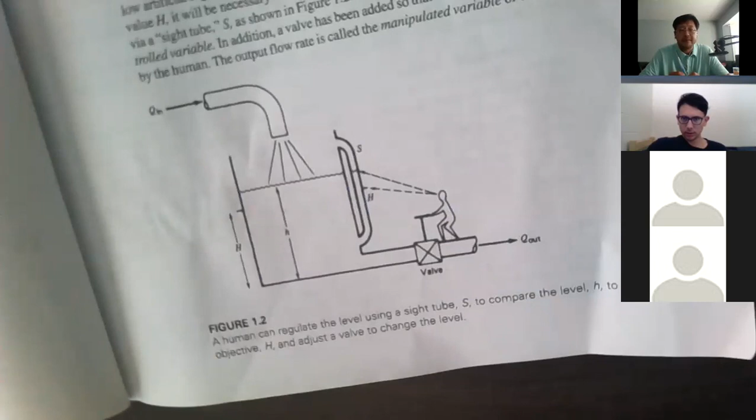Well, humans have been doing this for thousands of years. We just hire somebody, right? Well, people are expensive. You have to pay wages. And people can be tired, fall asleep, make a mistake. So this works, but this is better. As technology evolved, we figured out how to do it automatically. That's what we're going to study.

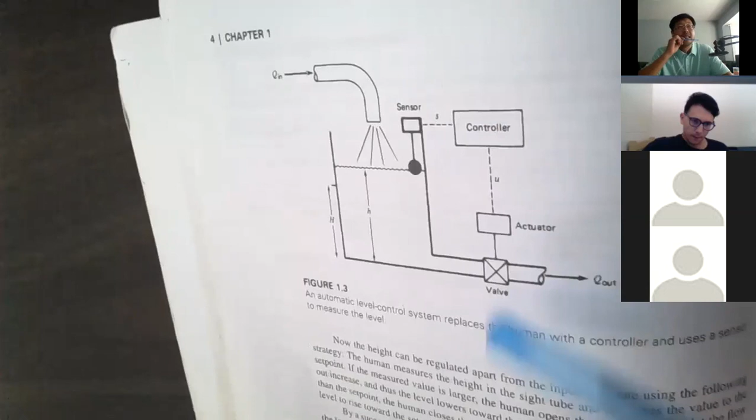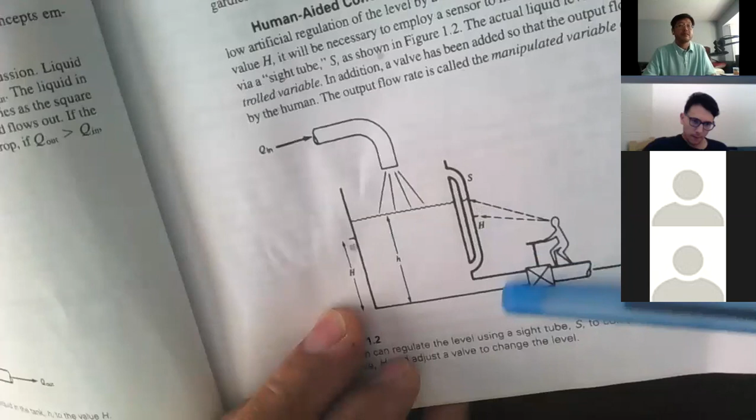Instead of having a person, we will have the eye, the muscle, the brain. So this literally replaces a human being. This is the brain, this is the eye or ear, this is the muscle, and the same valve, instead of being controlled by a person, will be controlled by an actuator. So that is what we're going to do and how we're going to do it. We will study each component.

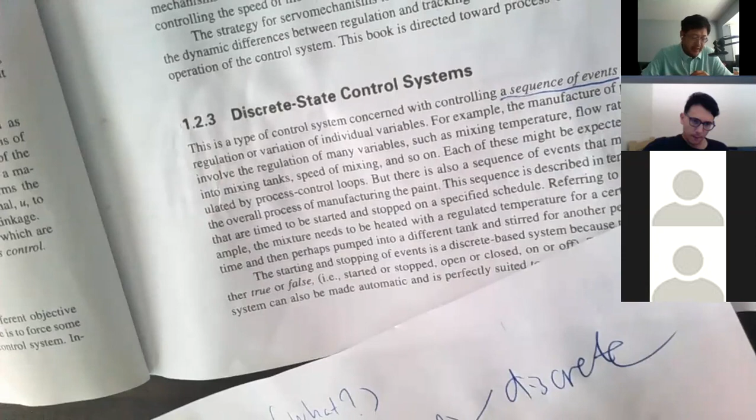There are two types of control systems. The first type is called the discrete control system. It acts like a timer. It will turn something on and off in a sequence, a sequence of events. A perfect example is the dishwasher. If you observe how a dishwasher works, it's just a sequence of events over about two hours, with timers turning different components on and off. That's called a sequence of events.

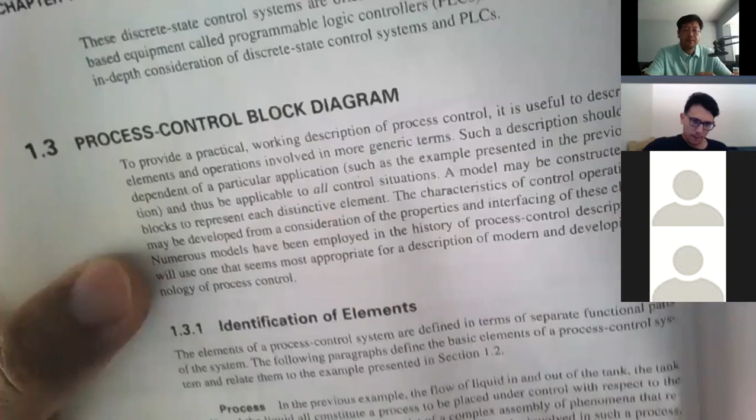That is actually not our subject. This book is not talking about a dishwasher. So what will this book cover? We will talk about pizza ovens. Actually, this book covers process control. One process control we use every day is the pizza oven. Instead of calling it a pizza oven, we call it process control. Just remember, it's the same thing as your pizza oven.

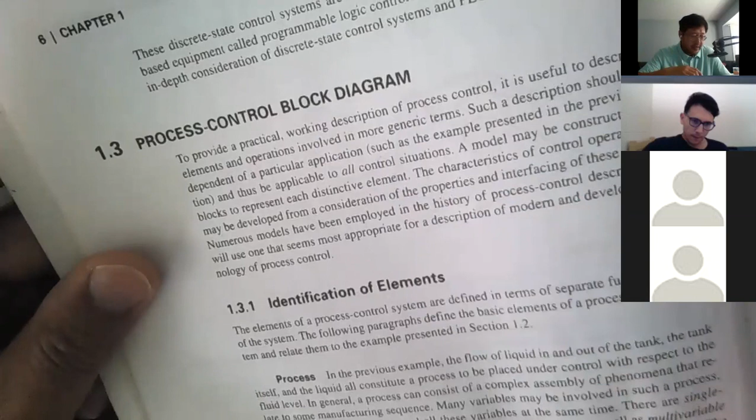Process control generally controls a process. In the case of a pizza oven, we control the temperature of the oven, right? In industrial or commercial settings, it's not just temperature. We may want to control the flow, the temperature, humidity.

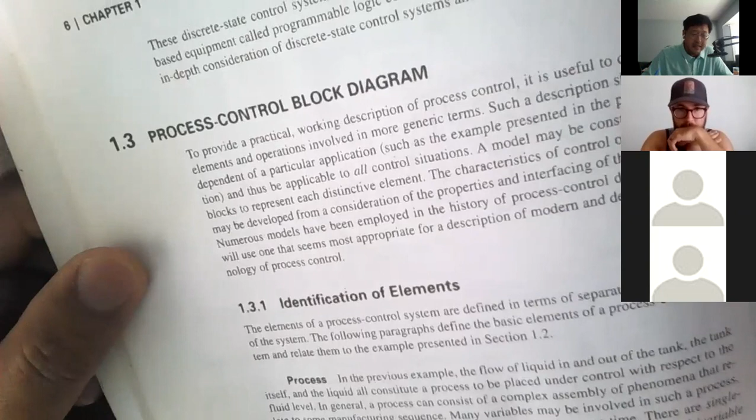Pressure. So we want to control a lot of things. In a typical industrial setting, we might want to control a few dozen different processes. So in a factory setting, we are talking about 20 or 30 of those controls. So we call it a process control.

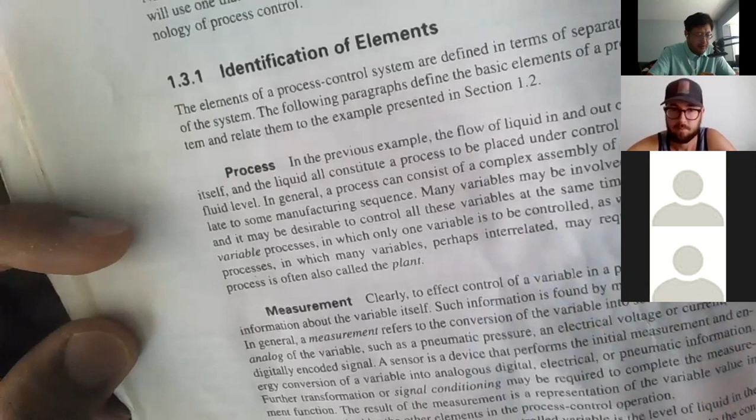So what is a process? A couple of definitions. A process is a variable which can be controlled. A process is a variable we can control. So a temperature is a variable. A flow is another variable. So multi-variable. We want to control those variables.

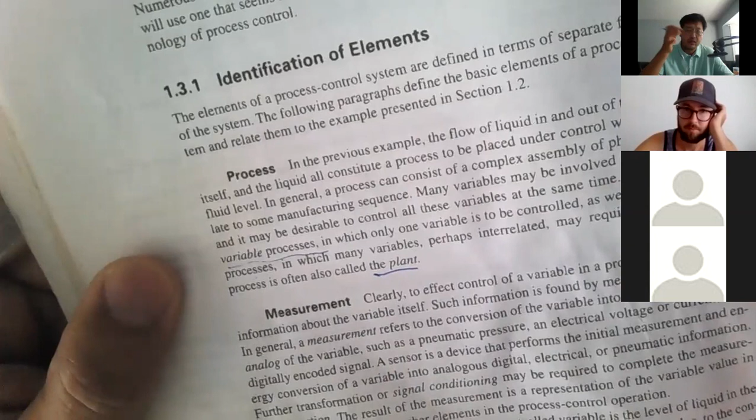So that's a process. A combination of all those is called a plant. So a plant may have 20 variables we want to control. When we're cooking cat food, for example, you might control the pressure, the temperature, the flow, whatever. So that's called a plant.

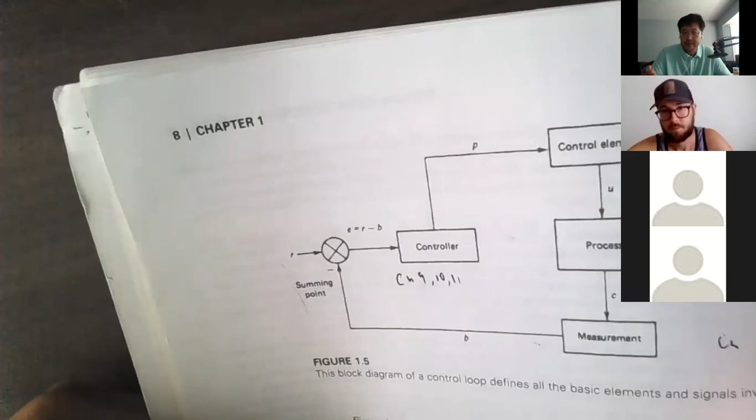What are the components? Number 3. We're going through pretty fast. We're already on the 3rd topic. The components of your system. What are the components? 1, 2, 3, 4. 4 components. So a process control system for a single variable, for a single process, we're talking about the 4 components.

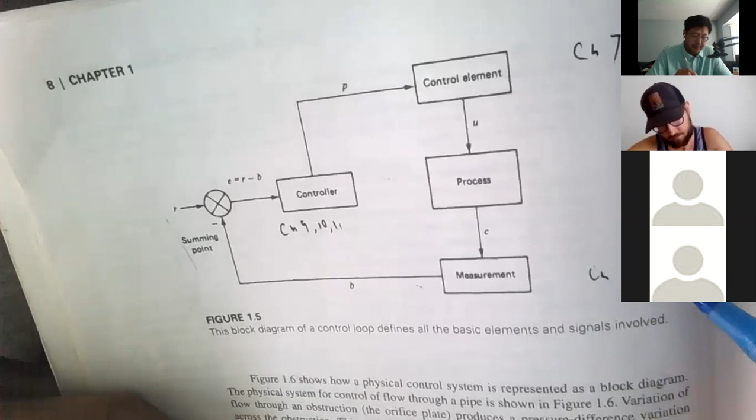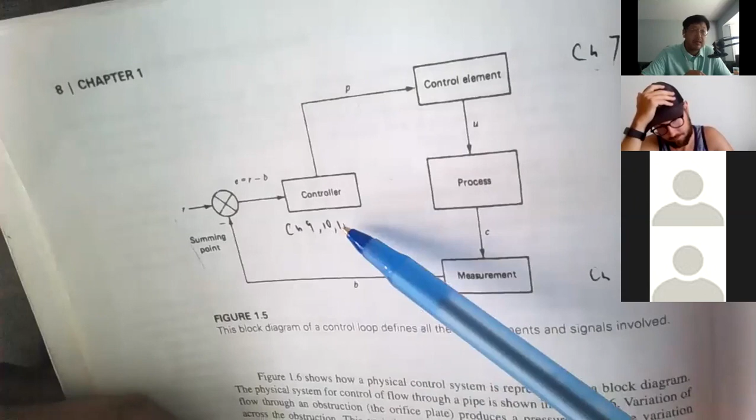And we started with this one. The first component is called measurement. We will talk about that in 3 chapters: Chapter 4, Chapter 5, and Chapter 6. Then in Chapter 7, we will talk about the muscles, the control element. That's the eye, that's the muscle. Then Chapter 9, Chapter 10, and Chapter 11, we talk about the brain of the control system.

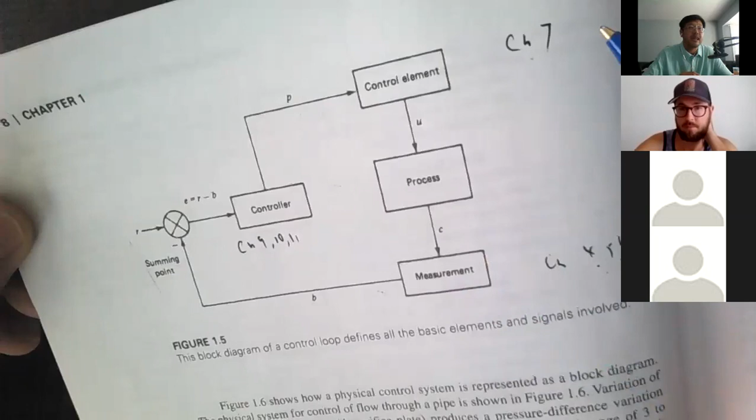So if you look at our textbook, we have how many chapters? We have 12 chapters. Out of the 12 chapters, 7 chapters are here: 4, 5, 6, 7, 9, 10, 11. Those are the key chapters, plus chapter 1, which will be the overall introduction. Then we will go into those chapters and cover each component. So that's our plan for the semester.

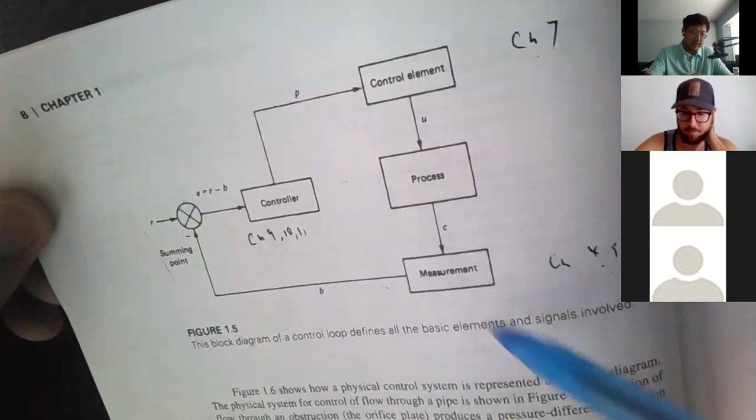We might stop at chapter 6 or 7 and have our midterm. After the midterm, we will continue. So those are the first half, and then we have a second half starting with chapter 7.

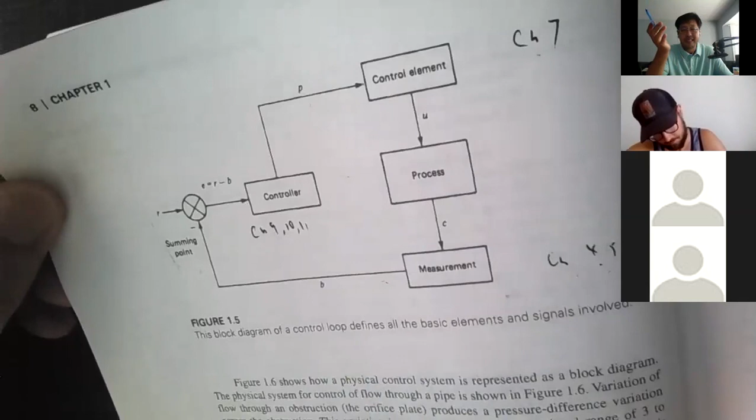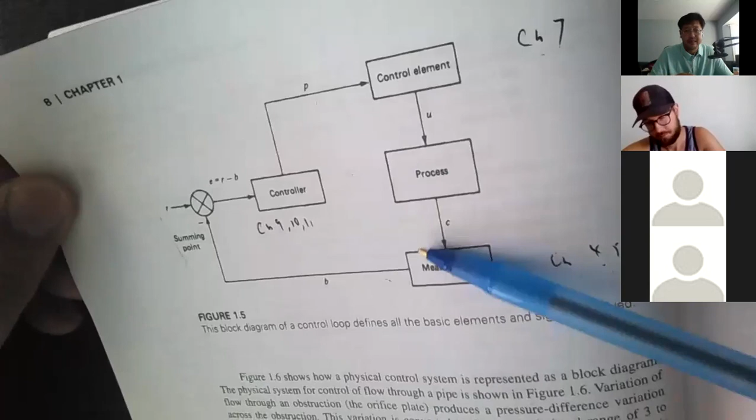So this is called the block diagram of a control system. If you notice, this control system forms a circle. So every control is called a loop. A plant might have 20 loops, right? That is one of the 20 loops for a plant. This loop is represented using what we call a block diagram. The loop can be represented many different ways. That's one way: block diagram.

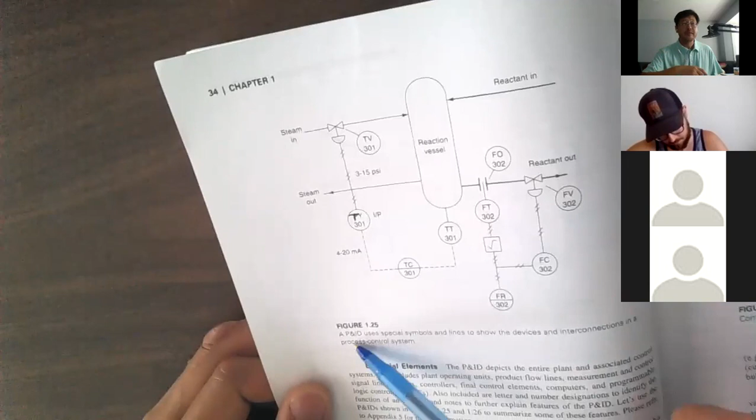Is there any other way to represent the loop besides block diagram? Yes, there are many others. What is the most common? What is the standard? This is the standard. The same loop, instead of a block diagram, this is called P&ID, piping and instrumentation. We'll talk about that later, but a single loop can be represented many different ways: block diagram and piping and instrumentation diagram, P&ID. This is the standard diagram. If you want to be a control engineer, that is the language you speak to another control engineer.

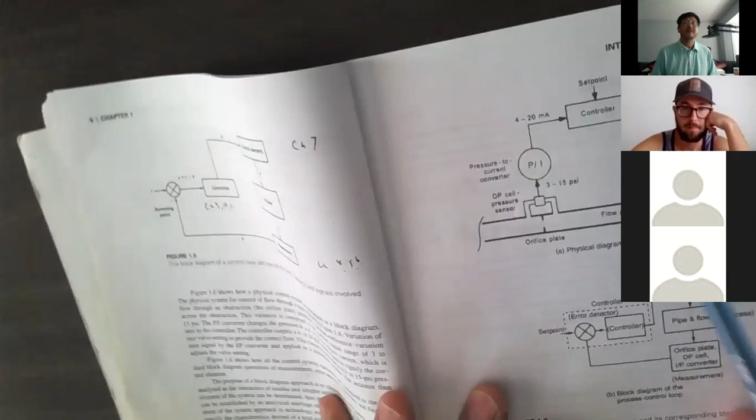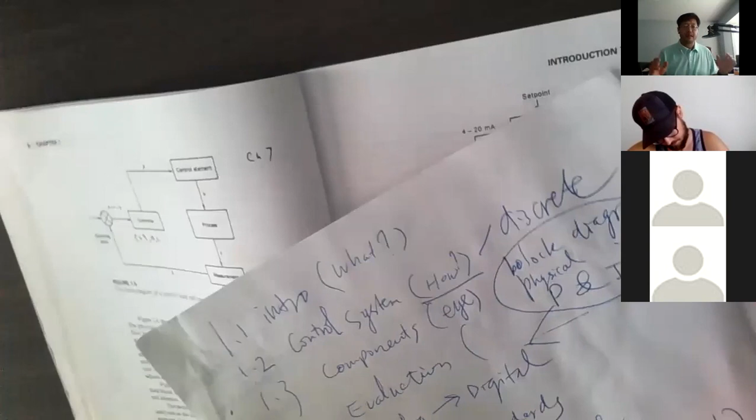Alternatively, another way to represent the same thing is called a physical diagram. This is a physical diagram. So we have a block diagram, a physical diagram, and P&ID. These are the three most common tools we can use to represent a loop, one process control.

So let's look at the physical diagram. The physical diagram is kind of like a picture of what's going on. It's not a realistic picture, but it's pretty good for engineers. So I can draw this. I cannot draw the realistic one.

So this is a flow control. So this is a pipe. We are pumping water, pumping oil, or pumping gas, whatever material you are pumping. And how do we control the flow? So this is the valve to control the flow. That's the sensor. So this is the eye. The sensor will measure the flow.

What is the output of my sensor? It's pneumatic output. So this is a typical sensor with a pneumatic output. The pressure will be 3 to 15 psi. So the minimum pressure, the sensor output will be 3 psi. The maximum will be 15 psi. So this psi, the pressure represents the flow, like 1 gallon per minute, or 10 gallon per minute, whatever. So this sensor output will go into our second component.

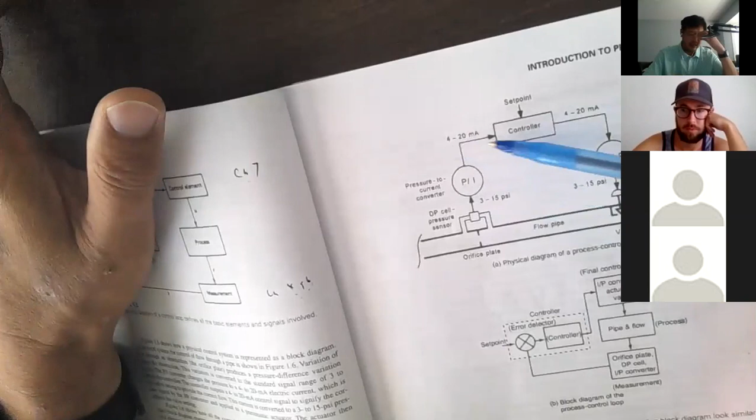So sensor, converter, and after we convert the pressure into milliamps, the milliamps goes into the electronic controller. So we are looking at some electronic components. And this electronic component will be the brain of the system. And this brain has a boss, right? The boss tells the brain how much flow. So basically the operator will set the set point. I want 10 gallon per minute. I want 100 gallon per minute. Whatever the operator wanted, he will set the set point.

So the controller will make a decision based on the set point. The decision will go to the muscle, right here. The decision is another current. So that's a typical controller, current in, current out. But this muscle does not recognize current. This muscle is a pneumatic muscle, a pneumatic actuator. The actuator wants pressure. So again, we have another converter called the IP converter. The IP converter will convert the current into pressure, and that pressure will open and close this valve.

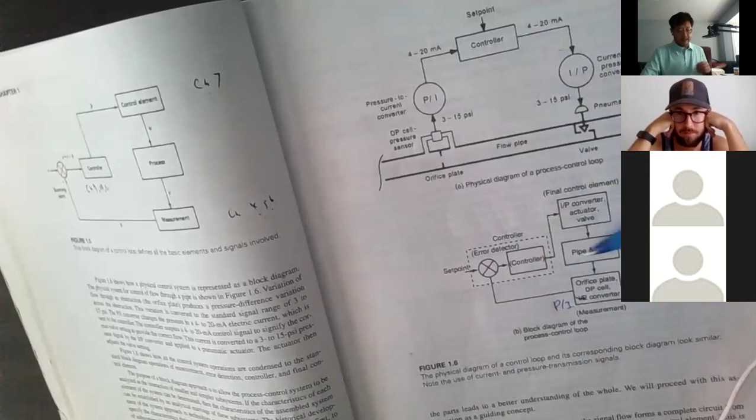So this physical component is represented right here. And then the next component will be the controller. The next component will be the actuator. And the pipe and the flow will be the process. So this is the block diagram. We are mapping one-to-one. That's the muscle. That's your process. That's your sensor. That's your brain.

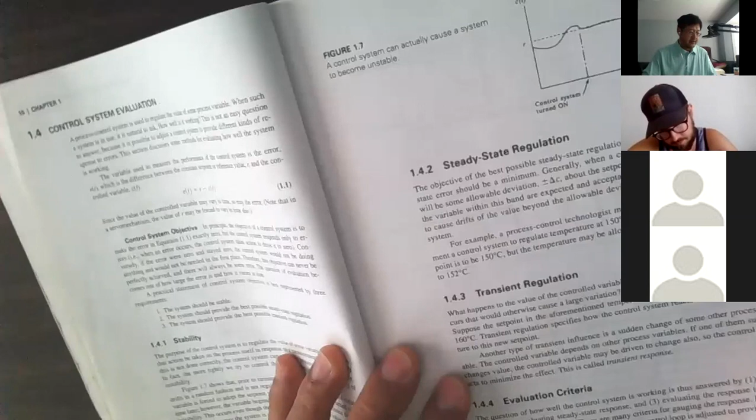All right. That's our third topic. Next topic is evaluation. How do we evaluate? What is a good control system? Well, it all depends on the requirement. So there are three ways to evaluate. First, is it stable? Second, is it accurate? Third, is it fast? So when we want to evaluate our control system, generally we evaluate with three criteria.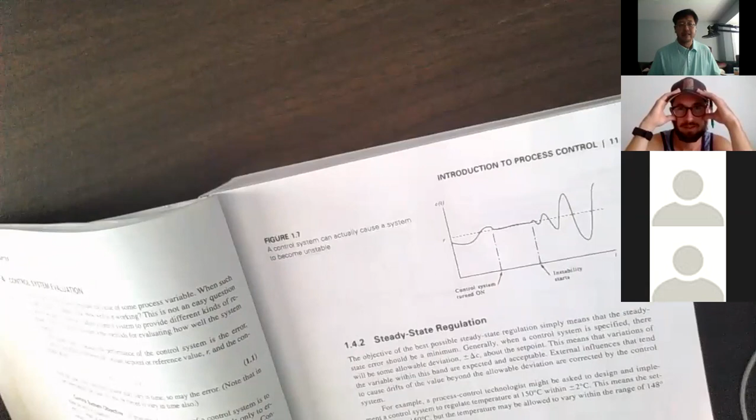Criteria number one, is it stable. That's called stable. That's called unstable. So this is unstable, obviously. That's a control system that completely failed. So when you're cooking cat food, your cat food will be either too cold, undercooked, or burned, overcooked. So that's unstable, lost control. So that's number one. Obviously, we want a system which is stable.

Second, even though your system is stable, how accurate is it? Accuracy. It all depends on the requirement, your customer. Your customer will decide how accurate you want your control system. For example, when you're baking pizza, you set the temperature to 350 degrees, right? Is that how you bake pizza? 350? 400? Okay, 400. You like crispy, right?

So 400. How about accuracy? Do you worry if it's 5 degrees off of 400? Or 10 degrees off, or 50 degrees off? 50 degrees off may not be acceptable. So accuracy is another thing.

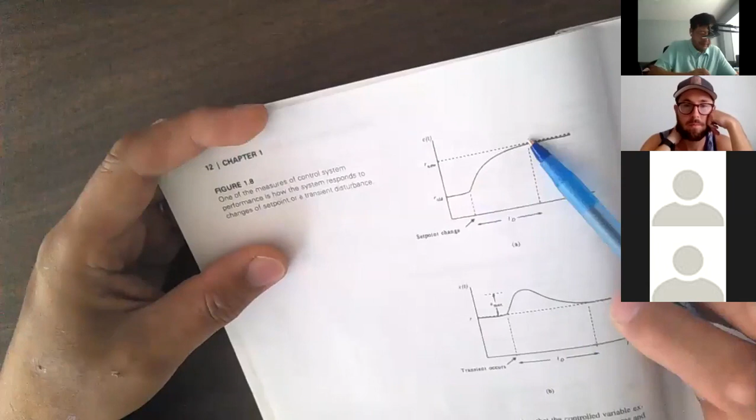And how do we reach our target? There are two methods, or two responses, to reach our target. Response number one is called damped response. So this is a damped response. A lot of our control systems have a damped response. Alternatively, we can have a second response called oscillating, or cyclic. So we might also have a cyclic response.

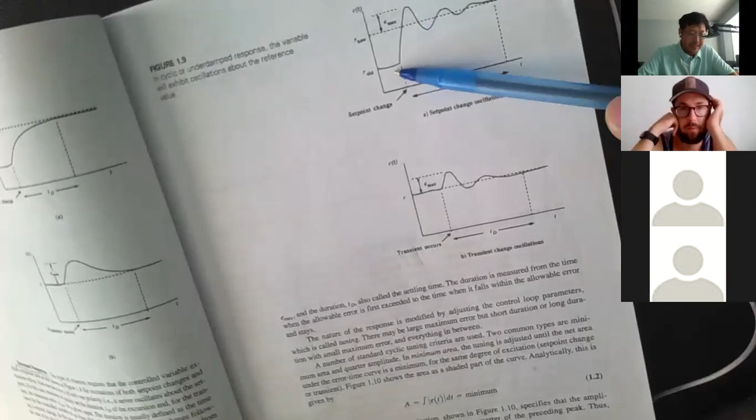Which one is better? Well, generally, if you want speed, that's called overcorrection. Like if you want to drive from here to Kansas City really fast. You drive so fast, when you brake, you pass Kansas City, like a bad driver. Then you back up, but you back too hard, and you go forward again, backwards, and finally you reach Kansas City.

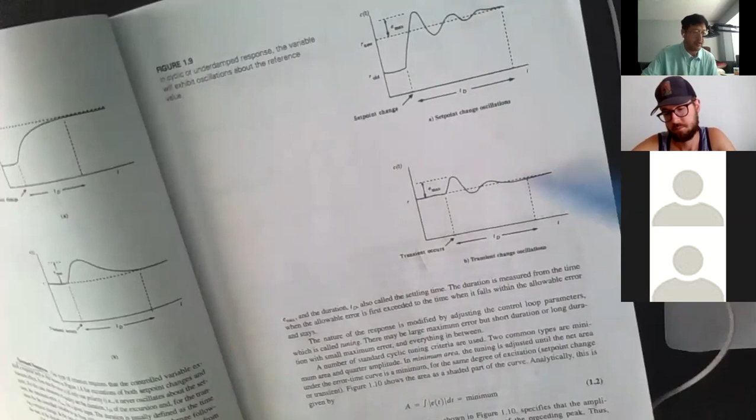That's terrible. But actually, that's a good way to control when you want speed. In many control systems, that's how we do it fast. If you drive, it doesn't make sense. But we're talking about, for example, the hard drive finding the right track. You find it pretty quickly that way. Of course, the damped response is always good. Many systems, for example room temperature, might do this. So that is damped and cyclic control. That's the first full topic.

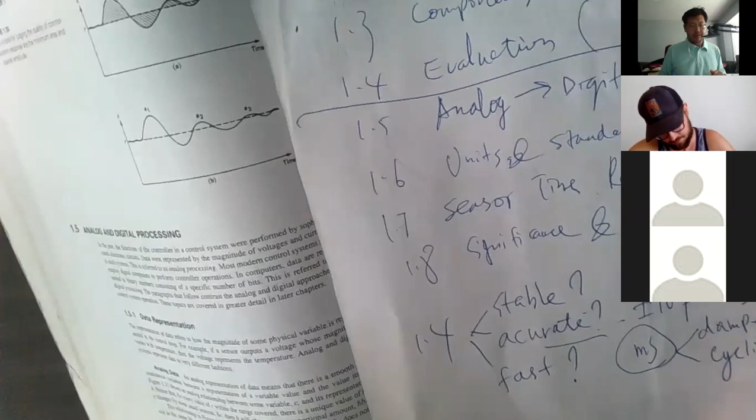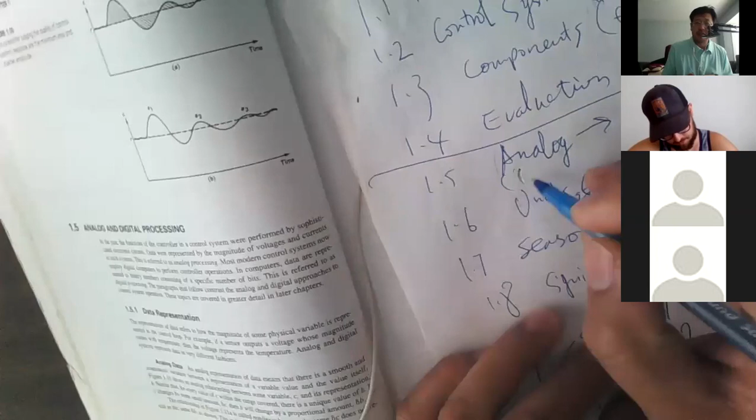So our next topic will be this evolution from analog to digital. Analog controllers are still very, very commonly used. It started, like I said, in the 30s, 40s, and 50s. At that time, we didn't have computers. Computers were multi-million-dollar equipment, big and huge. So most control started as analog controllers. Even before analog, we had mechanical or pneumatic controllers. So even an analog controller can be pneumatic or mechanical.

For the mechanical controller, a perfect example is your toilet, right? Everybody had a bathroom break 5 minutes ago. Your toilet is a perfect example of this control system, which is all mechanical. There's no electronics. It basically keeps your water level and doesn't flood your bathroom. After you flush your toilet, you never worry the water will overflow, because the mechanical system will shut off the valve.

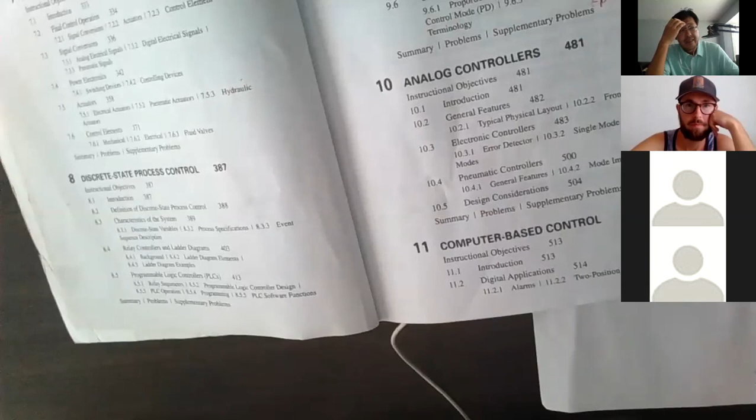Another analog type is pneumatic. We will talk about the pneumatic controller in chapter 10. So the analog controller can be electrical or pneumatic. The pneumatic controller is still used quite often. You are probably using it right now. If your air conditioner is turned on, there are pneumatic controllers in your air conditioning system. It's called the TXV. I'm not an air conditioning guy, but it basically controls how much freon you are pumping. So that is a pneumatic controller.

You have a needle. The needle goes in and out, which controls a valve. The valve controls how much freon goes into the evaporator coil. And the sensor is a temperature sensor, which is a pneumatic sensor, a capillary tube. The sensor is attached to the evaporator core and measures the temperature. If I want more coolant, the sensor senses the temperature is not enough, so it will automatically open and close that valve. So that's pneumatic control.

So there are a lot of analog controllers. Analog doesn't mean obsolete. Analog means simple and reliable. A lot of times, if you want something simple and reliable, we still have analog controllers. Of course, a lot of analog controllers are electric. Electric analog controllers are more common. At least for us, as an electronics program, we are more comfortable with electrical analog controllers.

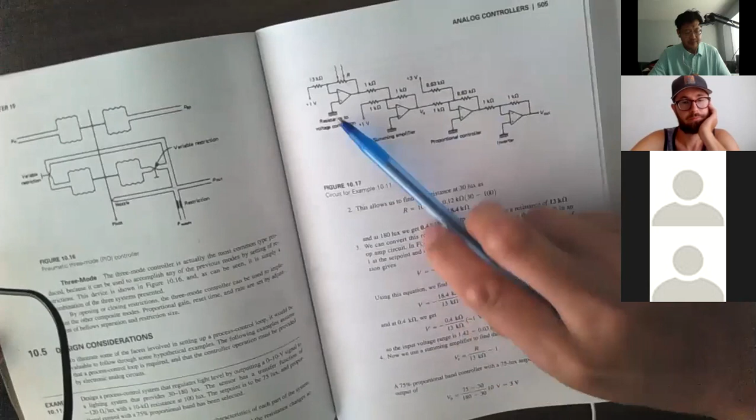Let me give you an example of electric analog controllers. This part is the brain. If you look at it, it's a bunch of op amps, operational amplifiers. They do mathematical calculations. Those amplifiers will add, subtract, integrate, or differentiate. This is addition, and this is subtraction. This is called integration. This is differentiation.

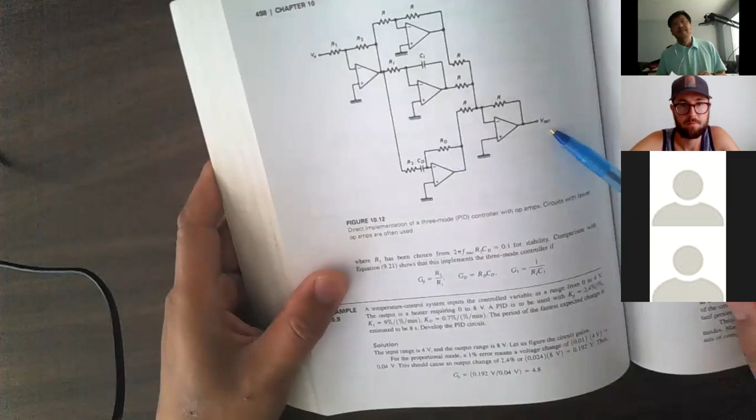And then this is addition. So we have 1, 2, 3, 4, 5 operational amplifiers, and each does a mathematical calculation. The end result of that calculation is the controller output. So that's my controller input, and that's my controller output. This is how op amps got their name: operation, as in mathematical operation. So that's an analog control system, still widely used. Well, then came digital. Everything is digital. So why?

Because it's easy. Okay, the technology develops because millions of people work so hard. Not only is digital easy now, it's inexpensive. How much does, like I said, this PID digital controller cost? $20, the whole package, $20.

Well, that is actually an off-the-shelf digital controller. I also said I built one myself. I will show you the one I built. It's in my office right now. I will bring it over to my home. How much does that cost? I built it myself. Make a guess how much it costs. $5. $50. So it costs more for you to make it yourself than to just buy one.

The $1 controller is my favorite. I have 8 of those around my house. Let me show you my $1 one. It's under the table, so I will crawl under the table and grab it. All right. Well, this is my... Actually, it's $5. I bought it for $5. The processor inside is $1. I actually opened it up. There's a couple of screws. You open it, and there's a little microcontroller. It's $1.

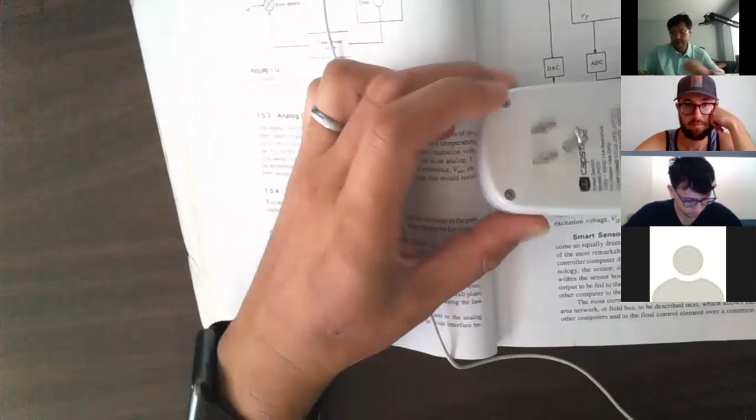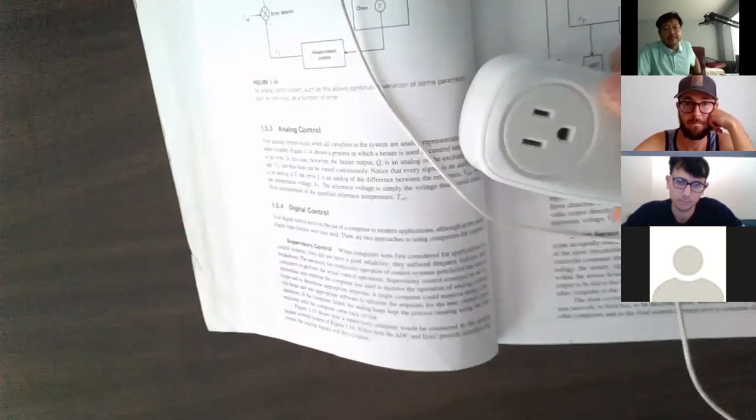It has Wi-Fi built in. This $1 controller is perfect for this. This is a Wi-Fi switch. I have 8 of those around my house. I use it every day. I turn on my lights, indoor, outdoor, turn on the air conditioner or heater, and also a dehumidifier, on and off, using my cell phone. This is Wi-Fi controlled, so I can use my cell phone to turn this thing on and off. This is my favorite controller, a Wi-Fi based controller.

Actually, $1 is the lowest. Generally, you can get those for like $3 on eBay or Amazon, and then you wait for a month. If you want the $1 one, they probably ship it out from somewhere in East Asia. So everything became computerized because we have these $1 miracle computers. Not only is it $1, it's Wi-Fi. Wireless. So this controller can be wireless. It's wonderful. Wireless is huge. So I don't have to have any wires to control a device. This is Wi-Fi, it needs a little bit of power.

What is the alternative to Wi-Fi if you want wireless? Bluetooth, right? Bluetooth is low powered. I see like $1, $2 wireless Bluetooth sensors or controllers powered by solar. So basically, you just throw it in your backyard, and you can measure your soil, the moisture level of your backyard. Like if you really want your lawn to be beautiful, measure whatever you want to measure. It's powered by solar.

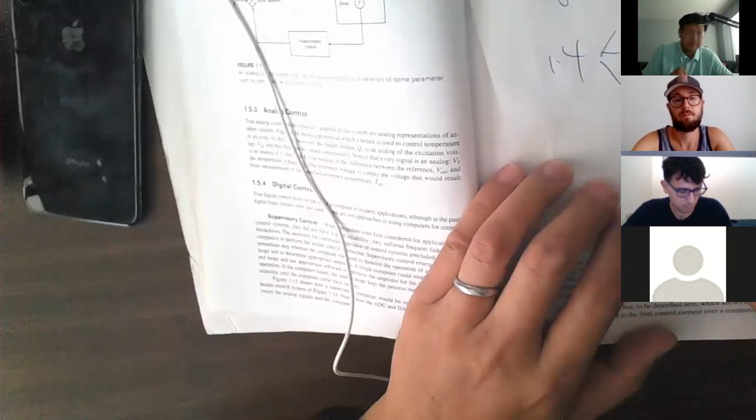So we have a local factory called Gray Manufacturing. We had a field trip a couple times. Did you ever go to Gray Manufacturing? They're cutting edge. They are called the Cadillac of car jacks. They make car jacks, the big ones, for 18-wheelers, the big trucks. Their car jack is wireless. So what kind of wireless do they use? They use this. This is another standard wireless technology, Zigbee.

The nice thing about Zigbee is it's called mesh or peer-to-peer. P2P, peer-to-peer. They don't need a hub. Wi-Fi, you need a hub, right? That makes things complicated. Peer-to-peer, so each jack can talk to the other jack. So your truck will raise and lower at the same time, right? Not one side going faster than the other, or your truck will flip over and somebody will get hurt. So that's Zigbee.

We have a lab on that. I still work on the labs, so we might do one of those. Zigbee. Right now, Gray Manufacturing outsources this technology; a very expensive consultant does this work. So hopefully after taking this class, you walk into Gray Manufacturing and say, hey, give that money to me, I will do it for you.

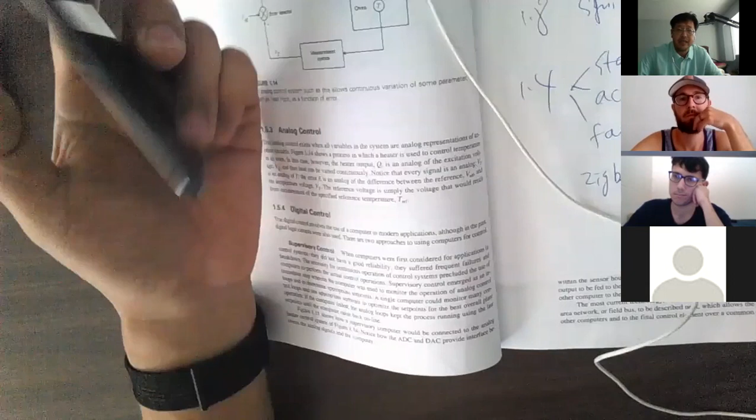Just like Gray Manufacturing, their cutting-edge car jacks are wirelessly controlled from your cell phone. And they pay tens, if not hundreds of thousands of dollars for the consulting fee. Right now, it's a company from Boston, Massachusetts. It was a professor from Oklahoma. They switched a couple years ago to another. I'm not sure right now who is getting paid, but I think we can do it locally.

We have the ability to control 4 car jacks moving up and down at the same time, right? So that's analog to digital. A lot of advantages for digital. So that's why everybody moved to digital. Even a car jack is computerized, digitally controlled. Right, let's move on to our next topic: units and standards.

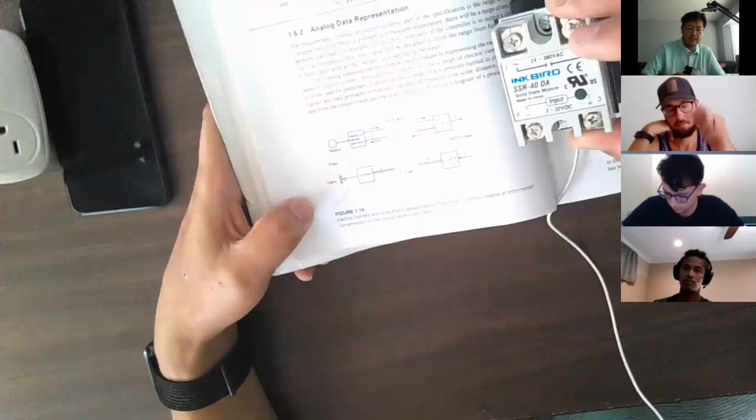In a control system, when we talk about current, we talk about standard current. We're not talking about this guy. This guy says 40 amp. Oh, I was just bragging. It's maybe 20 amp. This guy can handle 20 amps. We're not talking about 20 amps, we're talking about milliamps. 4 to 20 milliamps. So that's the standard current in a control system. So that's number one, the current. Number two is pneumatic.

Okay, now it's better. Let me turn on my light. Number two is pneumatic PSIs. So pressure.

I like to write something on the paper. It feels like in the classroom, I write something on the whiteboard, right? And I've also felt the best way to teach is I talk and write. Why? Because that will slow me down. I can talk, but if I write, it takes more time, and that will keep the perfect pace. Otherwise, when you only talk, you go so fast, like light speed.

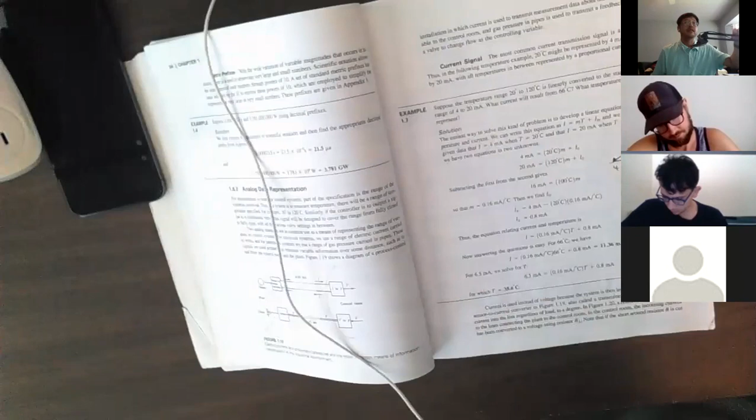Let's do one example. This is example 1.7 from the textbook. So let me zoom in a little bit. All right. So we got a sensor. We want to measure 20 to 120 degrees, and this sensor will measure 20 to 120 degrees. The output when the temperature is 20 degrees will be 4 milliamps, and the output when it's 120 degrees will be 20 milliamps. So this is my sensor: 20 degrees, output is 4 milliamps; 120 degrees, output is 20 milliamps.

Now, here's my question: if my reading is 12 milliamps, what is the temperature? 12 milliamps, what is the temperature? 70 degrees. How did I get the 70 degrees? How did I get that answer? Well, isn't 12 milliamps right in the middle of 4 and 20 milliamps? So the temperature... Perfect. Oh, okay. That's the perfect answer.

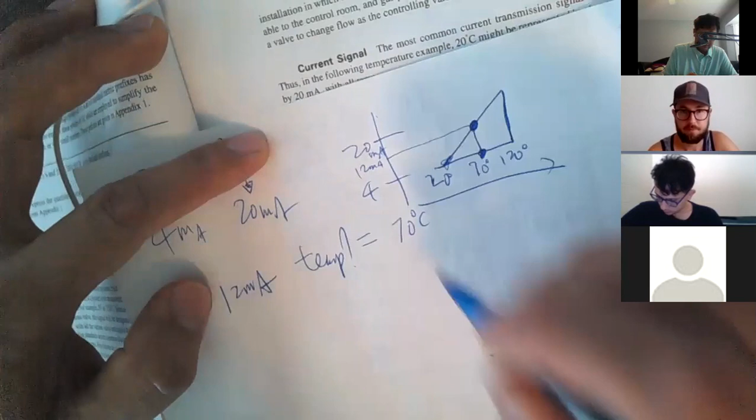How about 5 milliamps? What should the temperature be for 5 milliamps? Then it's not so easy, right? So in order to find out the temperature at 5 milliamps, we have to use this equation. That means 120 subtract 20 divided by 20 subtract 4. That is our first equation. 120 subtract 20, 20 subtract 4.

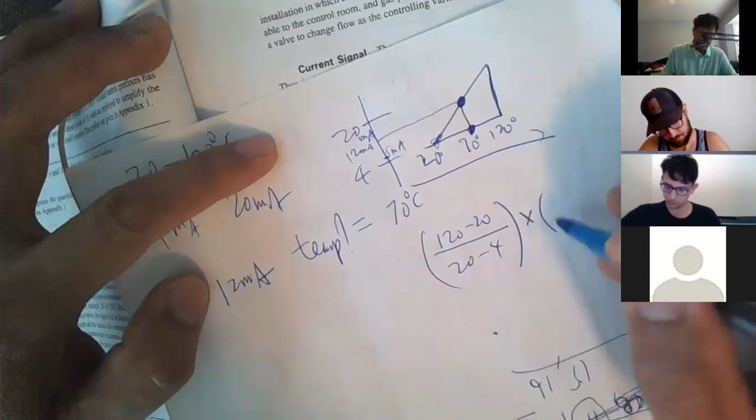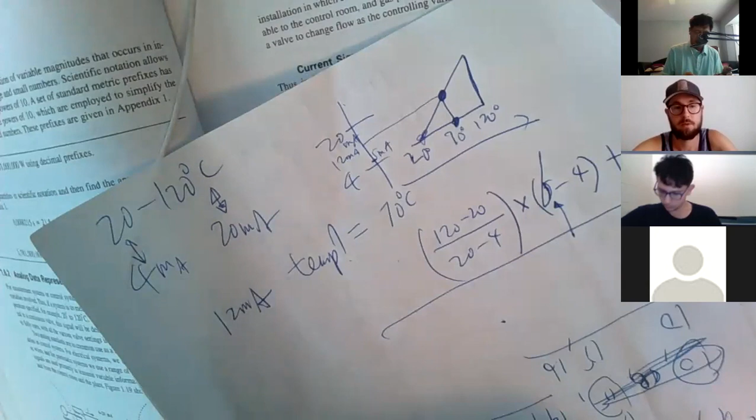Multiply by what? 5 subtract 4, plus 20. So that's the equation when we have 5. So if my measurement is 6, I just replace it with 6. Everything else will be unchanged. So let's do the math. What about 5? 5 will be 100 divided by... 5 milliamps, temperature 26.25.

How about 6? How about 12? We use this equation to verify 12 is correct. So, all right, that's the equation. This one is the only number that needs to be changed. So if it's a 6, it's a 6. If it's 12, you put 12 here. Everything else remains the same.

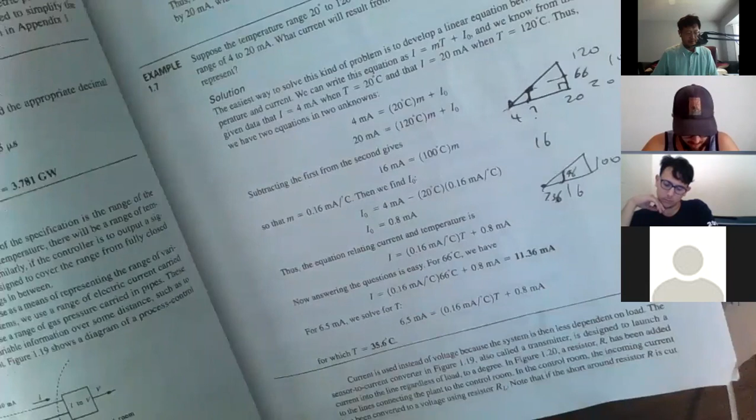The author said 6.5 milliamps. What about 6.5 milliamps? Yeah. It's 6.5, it's 35.625. So whatever current reading, we can convert it to temperature. Okay.

This is the first math, 1.6.1. 1.6.2, we'll talk about accuracy. So when we design or when we are given specs, we want to define accuracy. So accuracy, for example, plus or minus 10 degrees or plus or minus 2 degrees. That's the accuracy we required.

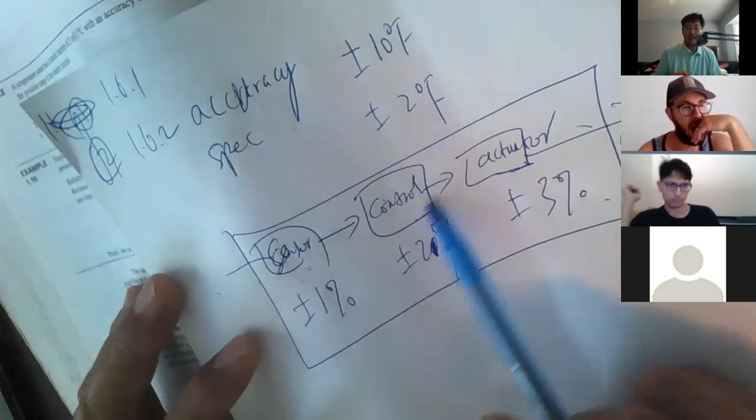So there are two ways to find the accuracy. First, add them together: plus or minus 6%. That's a rough estimate of the total accuracy of the whole system. You tell your friend something, it's distorted, and when it returns to you, all those distortions come back to you, right? So 1%, 2%, 3%, 6%.

Alternatively, we can use another equation, more accurate, but more math. So what is this equation? The accuracy will equal 1% squared... what does that equal?

(1% squared plus 2% squared plus 3% squared, and then square root. All right, square root. That is 1 plus 4 plus 9, and... Tim, you are almost right.

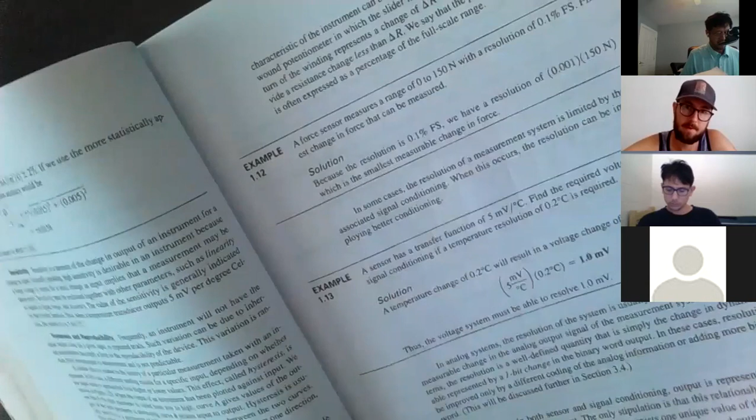The third topic will be a big topic. This is our third topic, P&ID. It's called the piping and instrumentation diagram. When control engineers design a control system, they draw a P&ID diagram. And this diagram basically is how they communicate with each other, how their control system is designed.

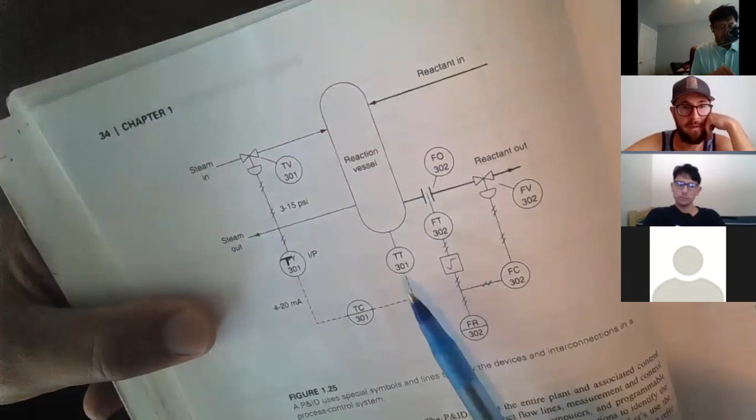For example, this one has one loop, two loops. So this is a two-loop control. One loop, another loop. Loop number one starts with a capital T. The capital T means temperature. So the first loop controls the temperature of this reaction vessel. The reaction vessel might be a pressure cooker for cat food, right? Locally, we have a pet food manufacturer, and that's one of their cooking vessels, for example. And you want to measure or control the temperature. So that's one, temperature.

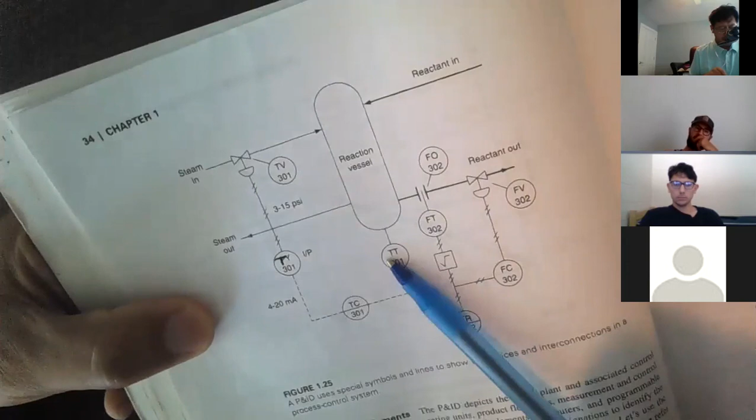T means sensor. C means converter. So temperature converter. So that's the temperature sensor. This is a controller. I'm sorry, C means controller. That's the temperature sensor, temperature controller, converter, temperature valve. And the steam goes in. If the vessel temperature is too cold, this valve will open. The steam will come in, and more hot steam will raise the temperature of your pressure cooker.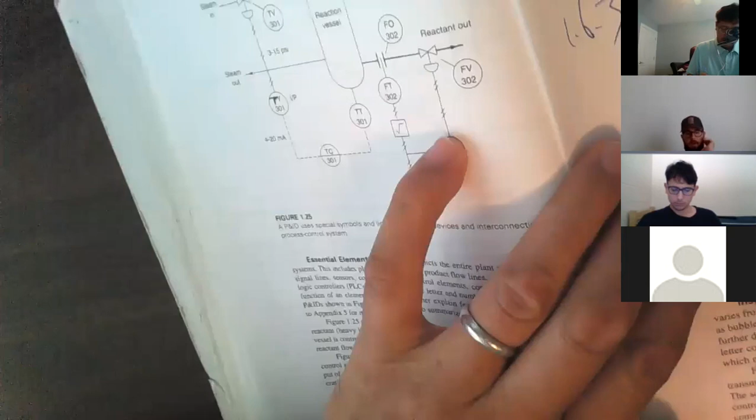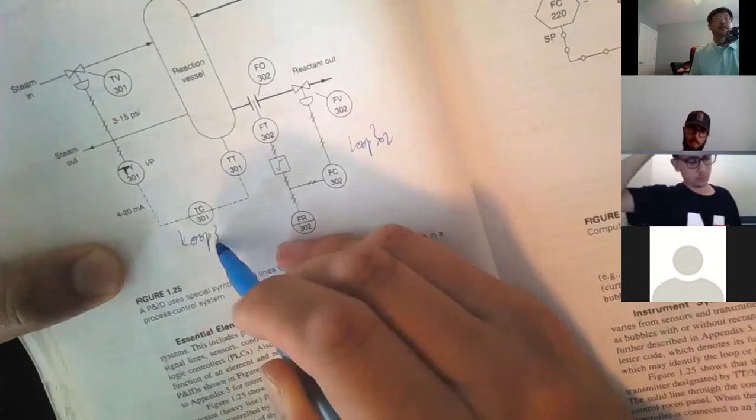The second control is called F. F is flow. So T, temperature, F, flow. All right, let's look at the flow sensor, flow controller, flow controller valve, recorder. FR, what is FR? Flow recorder. They also have numbers. 302. This is loop 302. What about the other loop? Loop 301, right? We have two separate loops in this plant. One is a temperature loop, one is a flow loop.

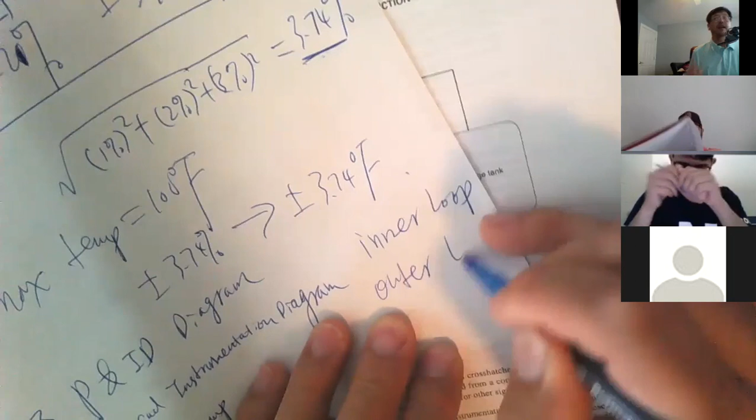What about this? Holding tank. This is a level. So this is a level sensor, level controller. The level sensor and level controller are the input for the F controller. So we have two controllers. This is called a nested loop. So you have a small loop, an inner loop, which controls the flow, and then you have an outer loop which controls the level.

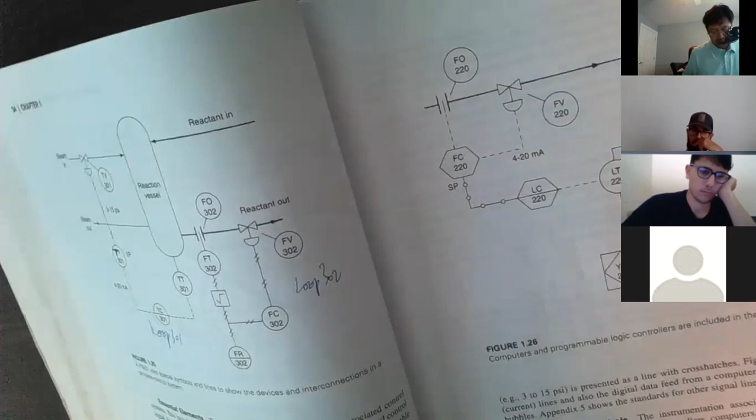You also have a third controller that controls the output flow. So for this holding tank, we pump material into the tank with this flow controller. This flow valve controls how much material is pumped into the storage tank. The third controller controls how much we pump out of the tank. And this inner loop and outer loop together control the level. So that is a control system. It's more complicated because you have an inner and outer loop.

So P&ID. What if I want to know more about P&ID? You go to page number 619. 619 tells you everything you want to know about all the symbols of this diagram. Basically, it's like learning a foreign language. Those are all the vocabulary. You can speak this language after you learn all the vocabulary.

All right, let's look at a couple of vocabulary items. Electrical signal, pneumatic signal. Let's look at electrical or pneumatic. So this is electrical. This is pneumatic.

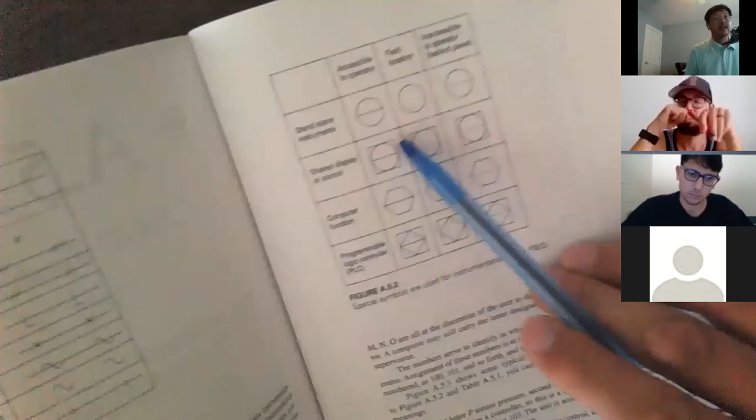You can also have hydraulic, capillary tube. So that's our first symbol. Second, you can have different symbols to represent the instrument. So circles, squares, different kinds of squares. All right, let's look at this.

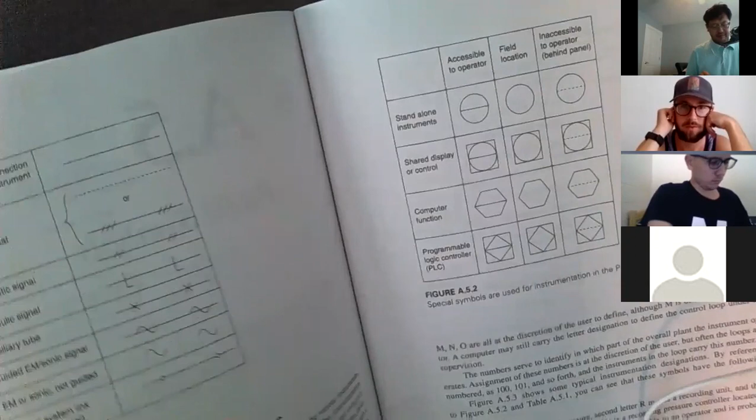Let's find a circle. That's a circle, right? What does that mean? That's a little circle. Circle means it's a stand-alone instrument. It's a little box you buy, stand-alone. So stand-alone. How about this square? We have a square. We have a square here.

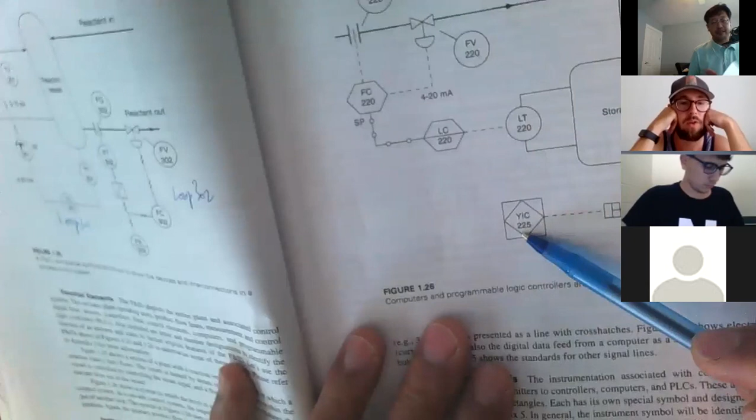We have this here. What is this? Let's find out. Computer access. Yes. PLC. So this is actually a PLC. That's represented PLC. Well, there are three different: dotted, no line, solid line. So what's the difference?

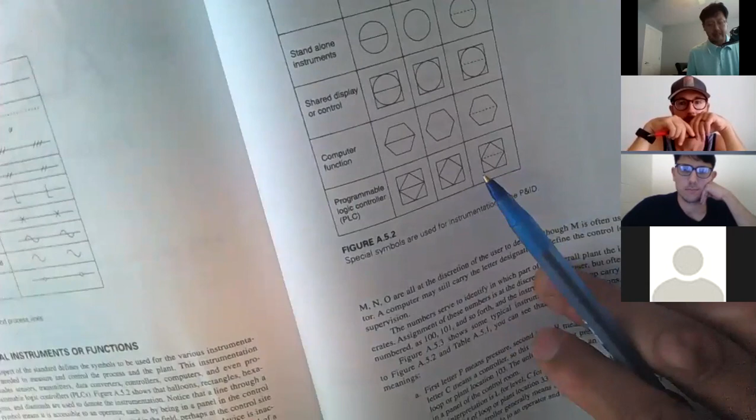Field location, inaccessible, accessible. This has nothing, so it's a field location. That means it's not inside your building. It's outside in the field, maybe a block away. Yeah, depends on how big. So it's a remote location. It's a PLC in a remote location. This means the PLC is probably next door or inside the same room the operator operates.

This means inaccessible, behind the panel. Okay. So although it looks like very simple diagrams, it represents different things. Computer function. Okay, let's find a computer function. Yeah, that's a computer function.

So it basically says these two controllers are computer. So you have a computer. One computer or two computers? Don't know. Maybe one, maybe two. Because actually what it really represents is two control software. They can run on two different computers, or they can run on the same computer. So piping and instrumentation diagram.

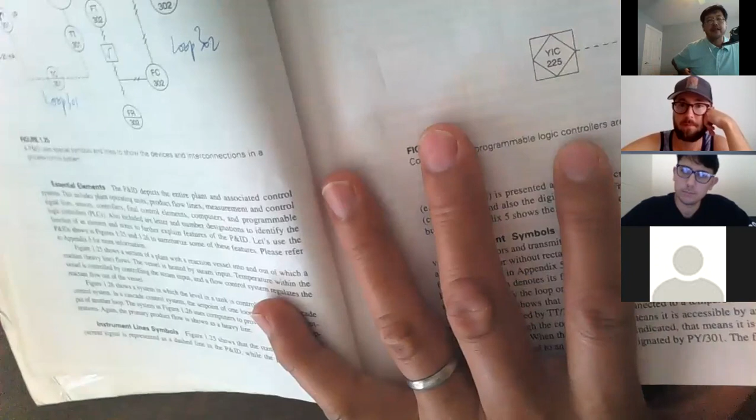So this is a transmitter, sensor transmitter, generally attached to a sensor, right? So it will send out the electrical signals, in this case, to the controller. That's electrical. What about this? Electrical? Yes. This is electrical. From here to here, electrical. How about from here to here? Not electrical.

Hydraulic? No. Internal system. Yeah, computer signals. Basically, the computer tells the other computer what to do. Because you have two computers here. This computer makes a decision and tells the other computer what to do. Okay, computer connections. All right.

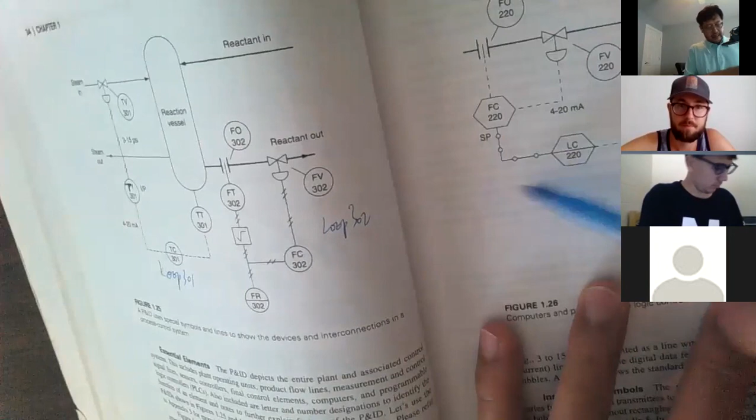Okay, I want to show another thing. What about this guy right here? Right there. Right here. Math operations, square root: the output is the square root of inputs. Multiplication, division, and a random function. So we actually have a square root extractor. We call it square root extractor. So we do some mathematical calculations right here.

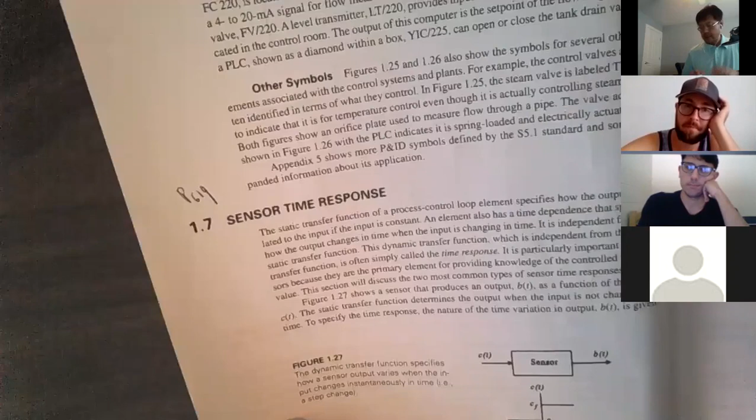All right, my goodness. Have 2 hours passed? We're unable to finish. I think I'll just stop here. Too much material. I don't want everybody to be overloaded with too much. I tried to cover all 8, but unfortunately, it's too much. We're already at 2 hours. So we will stop right here. Actually, chapter 1 is a big chapter. So much information. The next 2 topics will be math. So we'll pick up next week, topic number 7, topic number 8.